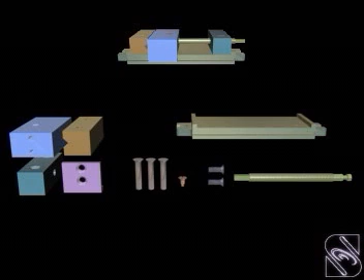Machine vise. Machine vise is used to hold and grip workpieces for machining purpose. The main parts of this vise are the base, the block, the fixed jaw, the sliding jaw and screw spindle.

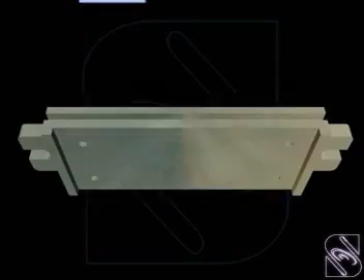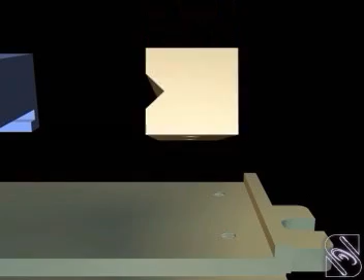The base, made of cast iron, has lugs provided to clamp the assembly on the machine bed. The base has rectangular slots cut longitudinally on both the sides. These slots guide the movement of the sliding jaw.

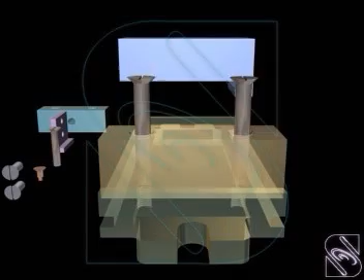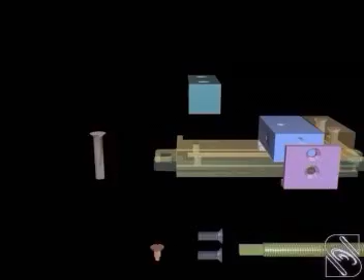The fixed jaw has a V-cut and holes to receive the clamping screw, while the sliding jaw has a finger-like projection at the bottom of one of the sides. The fixed jaw is screwed to the body.

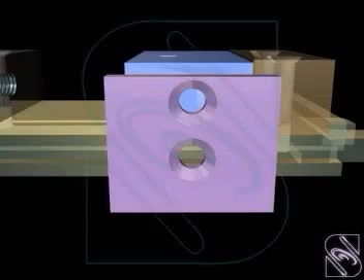The sliding jaw is placed on the base in a manner that the projection locates into the groove of the body. The lock plate is fitted on the other side of the sliding jaw using screws. Thus, the sliding jaw can slide along the base, but it cannot lift up.

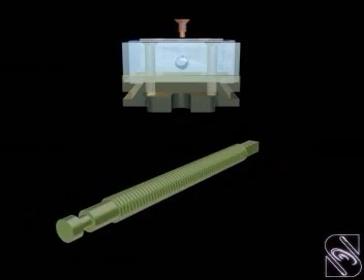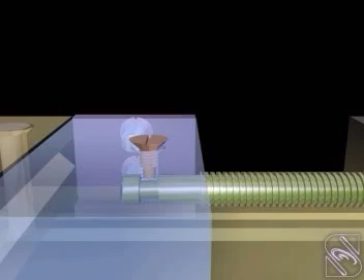The block is screwed to the base on the other side. The threaded hole in the block receives the spindle. The spindle is assembled with the sliding jaw and locked using the dog-ended screw.

By rotating the screw spindle, the sliding jaw is slid towards or away from the fixed jaw, enabling the clamping and unclamping of workpiece respectively.